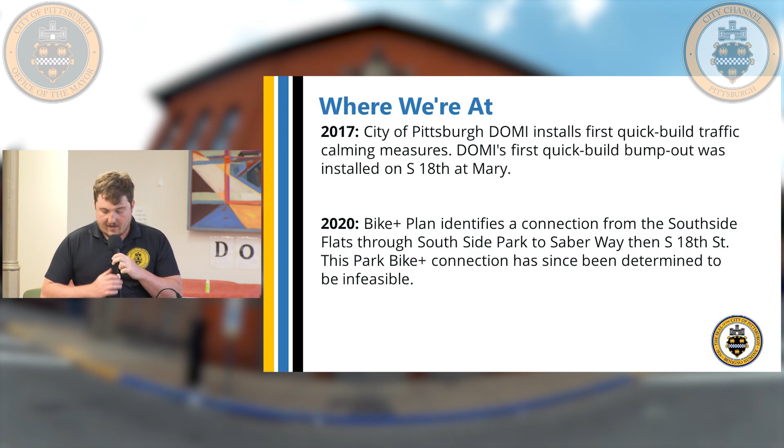So why we're all here is to share the safety context and planned improvements along the South 18th Street corridor between East Carson Street and Monastery Avenue. A little project background: in 2017, DOMI installed the first quick build traffic calming measures, and the first quick build bump out was installed at South 18th and Mary. In 2020, the Bike Plus plan identified a connection from the Southside Flats through Southside Park to Saber Way, and then South 18th Street. That Bike Plus connection has been determined infeasible because of grade changes through the park, so we're looking at making that connection on the street.

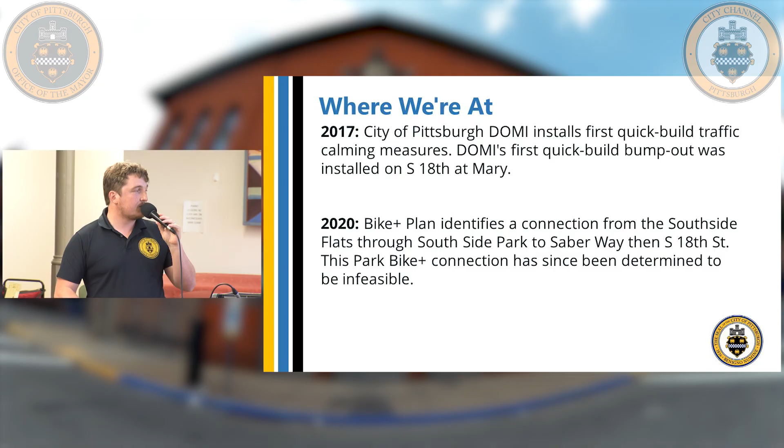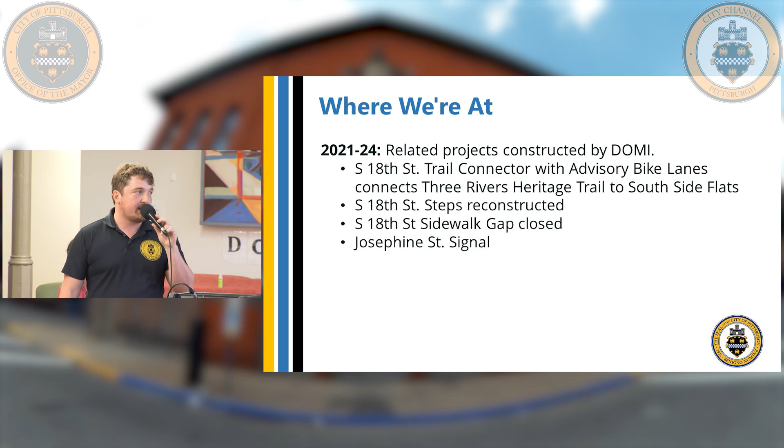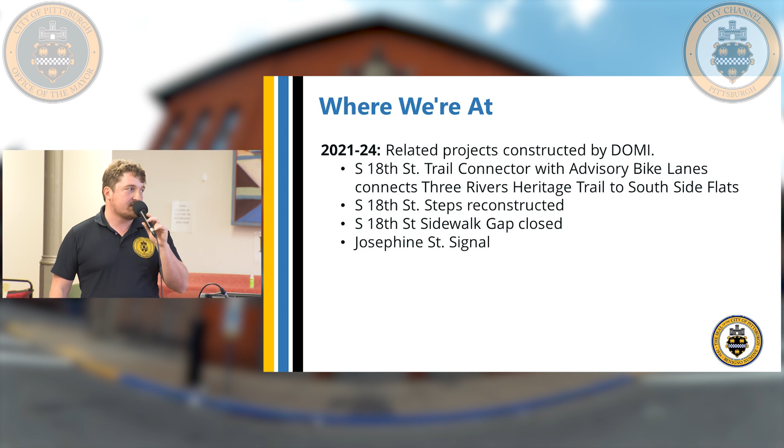There's been a number of related projects that tie in at various extents. There's the South 18th Street Trail Connector with advisory bike lanes that brings it from the Three Rivers Heritage Trail to Carson Street. This spring, the South 18th Street steps were reconstructed, and the South 18th Street sidewalk gap was closed. There's also been changes to the Josephine Street intersection, adding a signal.

Some additional context: in 2024, the city committed to Vision Zero and published the High Injury Network, I'll be talking about that in a second. We also secured funding for Vision Zero projects and chose this project as the 2025 corridor project. Started doing data collection, virtual engagement, some of you have probably been on the Engage PGH page, and now we're here collecting more feedback from folks.

Some of you have probably heard about Vision Zero, it's been a pretty big publicity effort of the city over the last year, but this comes on the heels of a worsening traffic crash epidemic. In 2024, 21 people died in crashes on Pittsburgh streets, and between 2019 and 2023, crashes involving vulnerable road users, cyclists and pedestrians, rose 40%. The 2024 data does show we might be starting to turn a corner there, the number of crashes involving vulnerable road users in 2024 was actually below the number in 2019. I don't think that's a long enough trend to say we've definitely turned a corner, though.

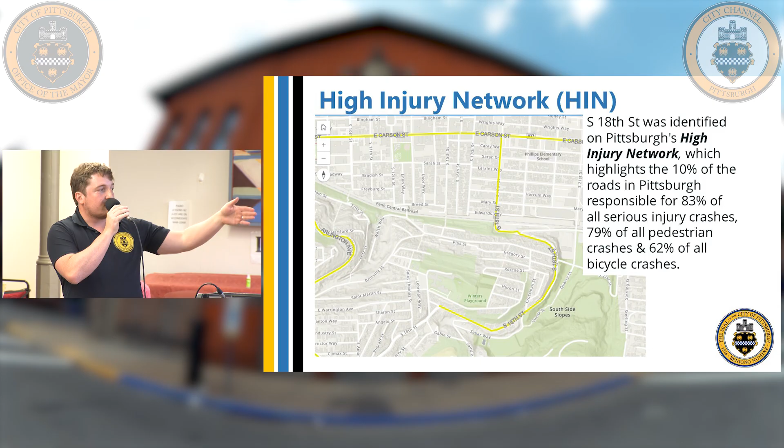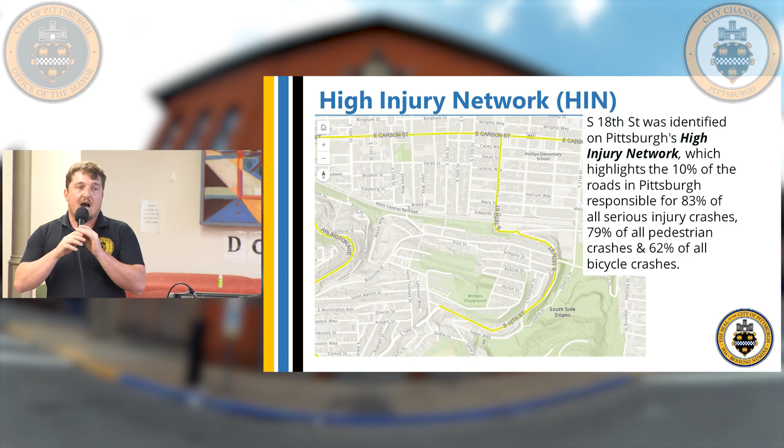So I talked a little bit about the high injury network. The high injury network is the 10% of roads in the city of Pittsburgh responsible for 83% of all serious injury crashes, 79% of pedestrian crashes, and 62% of all bicycle crashes. South 18th Street between Carson and Monastery is highlighted on that high injury network, as is Carson. This data is based on crash data from 2019 to 2023. Some changes on the north section of South 18th Street and Carson Street took place in 2022 and 2023, so we expect to see improvement in some of those places already based on prior changes.

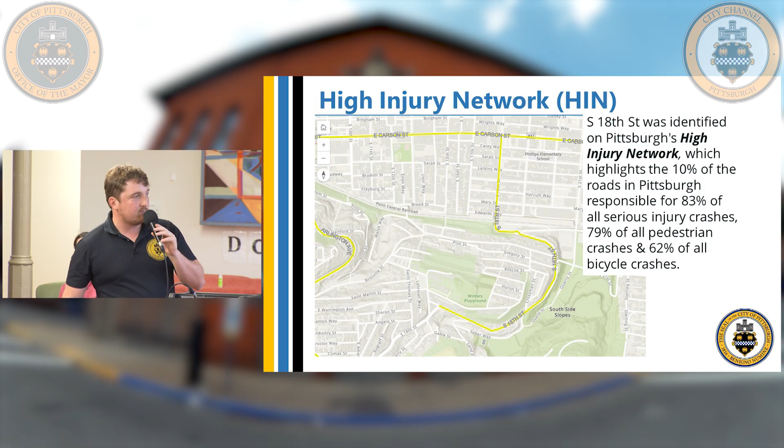Before I move on, I want to make a quick note about Vision Zero. These were at the registration table - this is our Vision Zero community agreement. As the city of Pittsburgh, we have a responsibility to help make sure our roads are safe. But this is also an agreement from our community members to do things like put down your phone while driving, drive at safe speeds, and yield to pedestrians. We're also using it to get in touch with people and keep them updated about Vision Zero, so you can tear off the back part of the slip, leave it at registration, and we'll collect it and add you to our contact information.

So with that, I'm going to hand it off to George to talk about the project context.

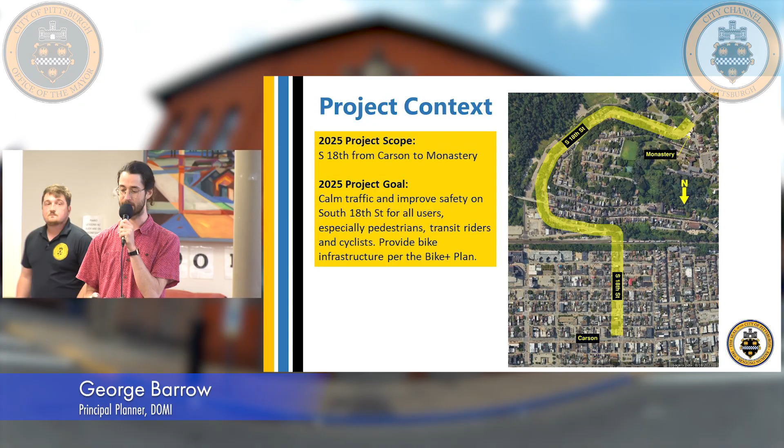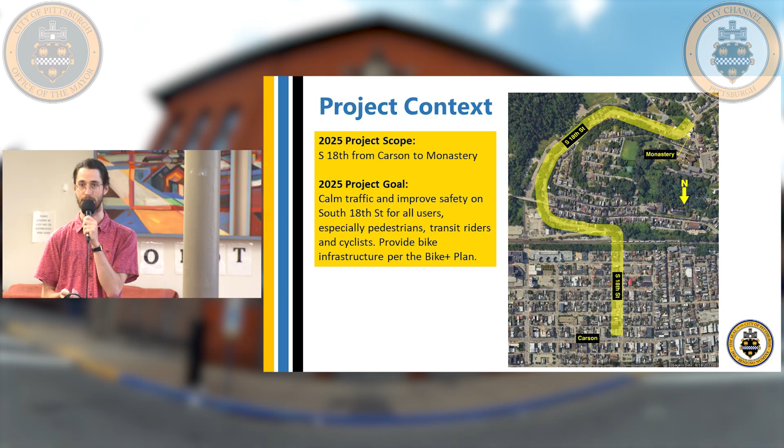All right, thanks, Jan. My name is George Barrow, principal planner with DOMI. Here we see our project context - it actually matches the extent of South 18th that were on that high injury network from the slide before. That is why the corridor terminates at Monastery Ave rather than continuing all the way up to perhaps Arlington. It goes from Carson uphill to Monastery; uphill is up on this map. The goal of the project is to calm traffic, improve safety on South 18th for all users, especially pedestrians, transit riders, and cyclists, and to provide the bike connection called for in the Bike Plus plan.

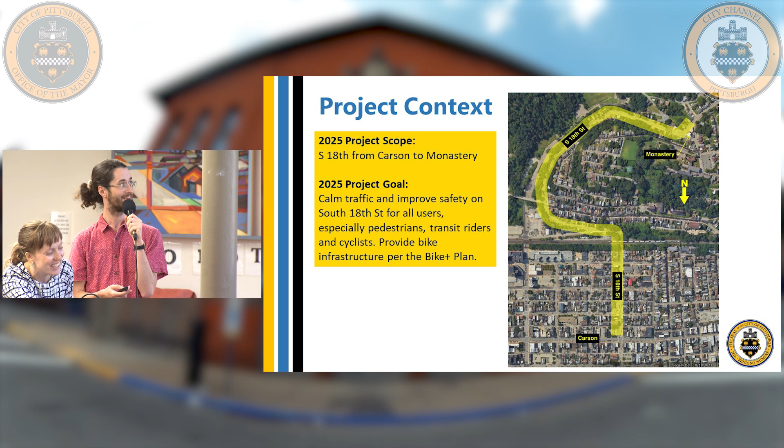Okay, I will speak up. Try turning this - turn it to what you added. You want to say something? Test, test, test. Is that too loud? Is that okay? Better? Okay, sorry, I'm a bit soft-spoken, I realize that.

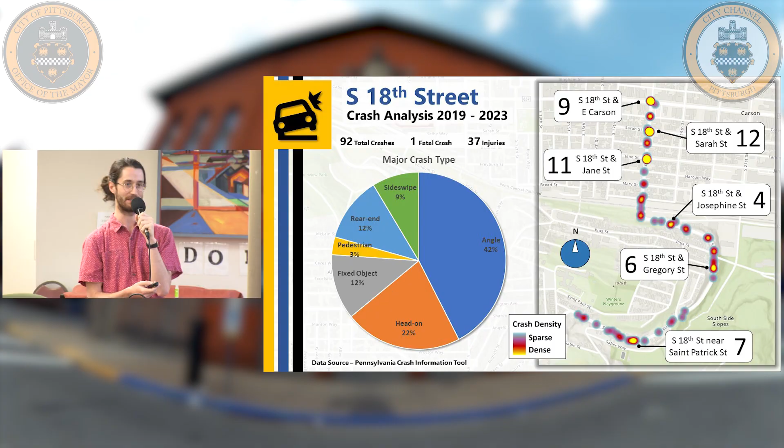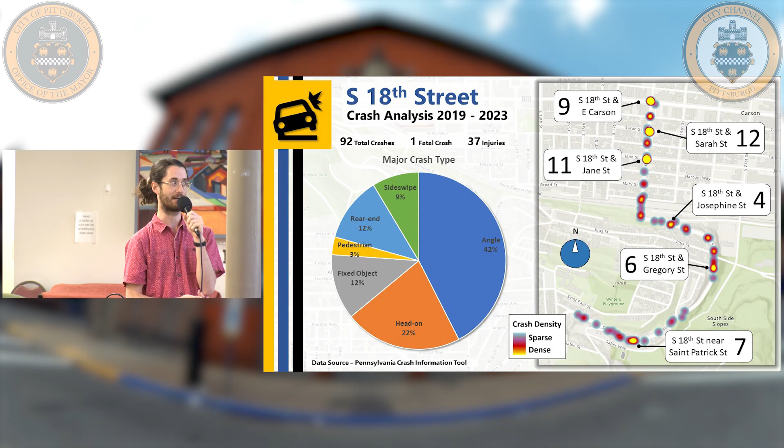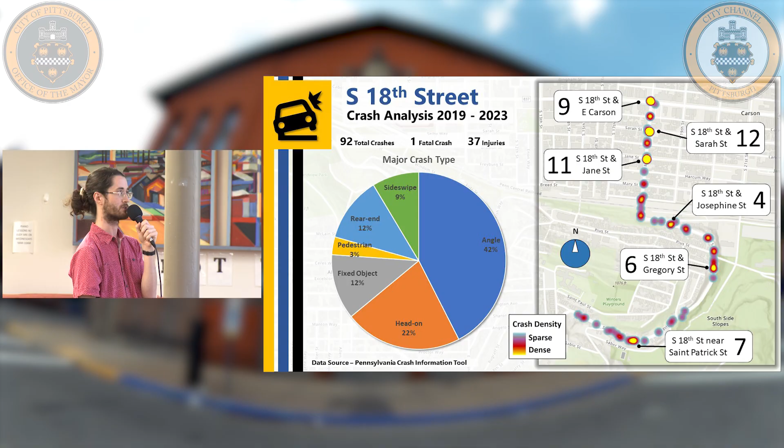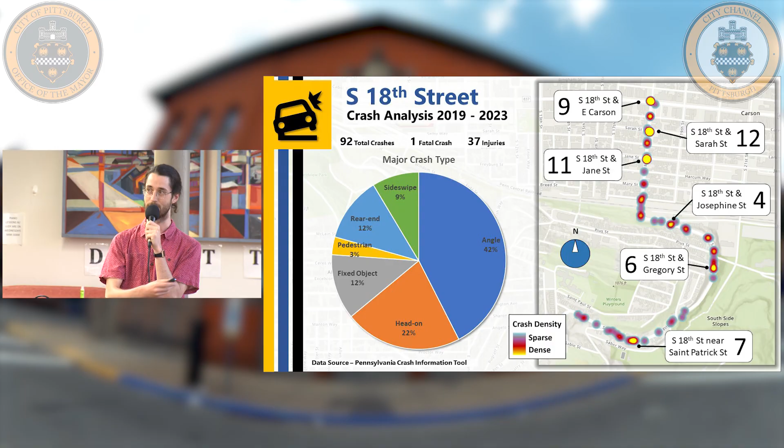So on this slide, we see some of the crash history along South 18th Street. Previously we mentioned it's on the high injury network, but here we have a bit more detail - this is a heat map of where those crashes are happening. You'll notice some high rates of crashes, particularly at intersections and at curves along 18th. In the flats at the top of the map over by Carson, you'll see crashes at intersections. Note this is crash data from 2019 to 2023, and there are actually improvements already in place at Sarah Street and Jane Street, where you see those crash concentrations, as well as improvements at East Carson itself - concrete curb extensions and signal upgrades completed just a few years ago, so those improvements were not in place when this crash data was captured. But along the rest of the corridor, going up the hill, you'll see particularly high rates of crashes at those curves, particularly around Mission, Gregory, and then at St. Patrick, just downhill from Monastery.

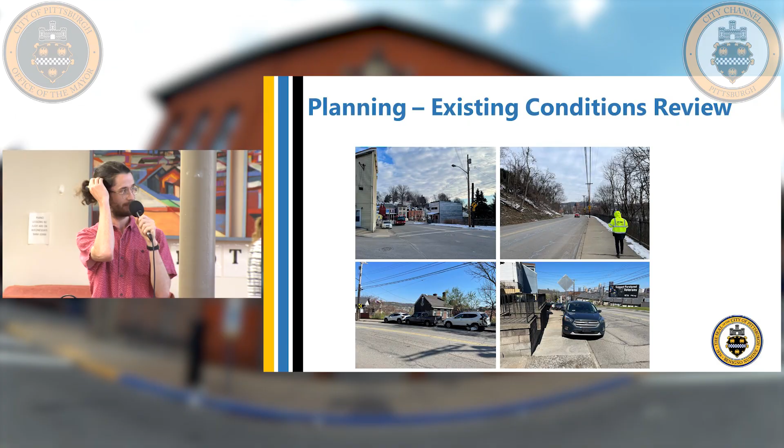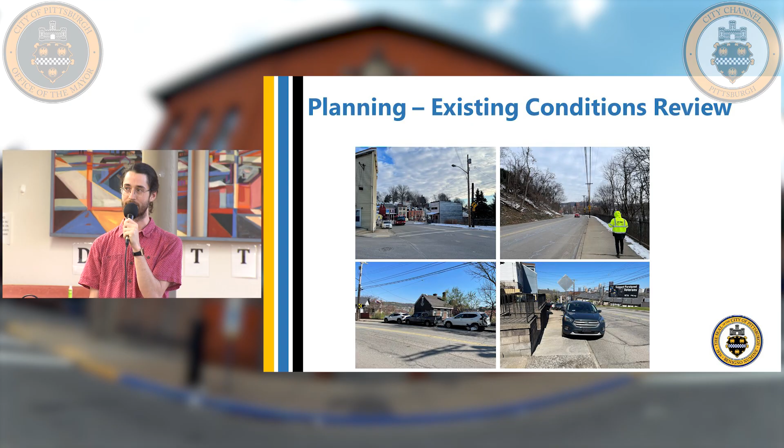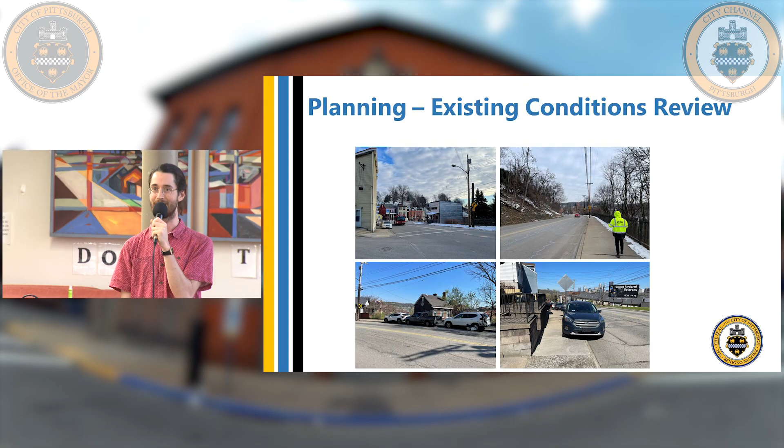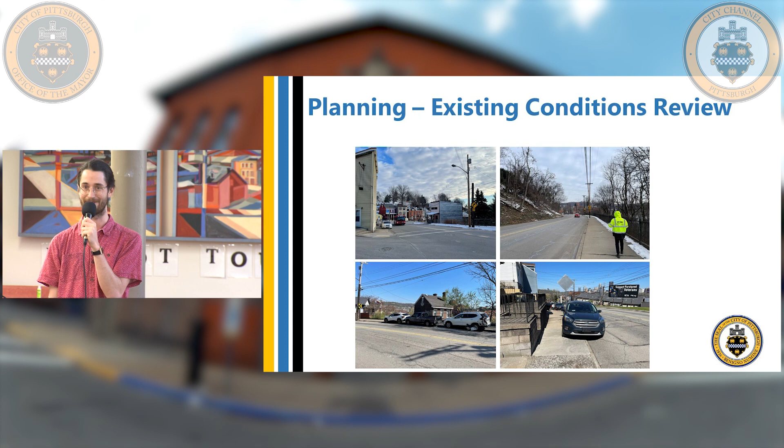So given all of that context, we started going out and walking the corridor. Just a few things we spotted on our very cold January walks of South 18th Street were some obstructed sidewalks - there's a lot of sidewalk parking on this corridor. I want to point out on that bottom left image, you can see some serious damage to vehicles parked along South 18th Street, perhaps showing why people are feeling they need to park on the sidewalk right now. These vehicles being parked on South 18th are frequently being sideswiped, so a lot of damaged vehicles and pieces of vehicles along 18th on our field walks.

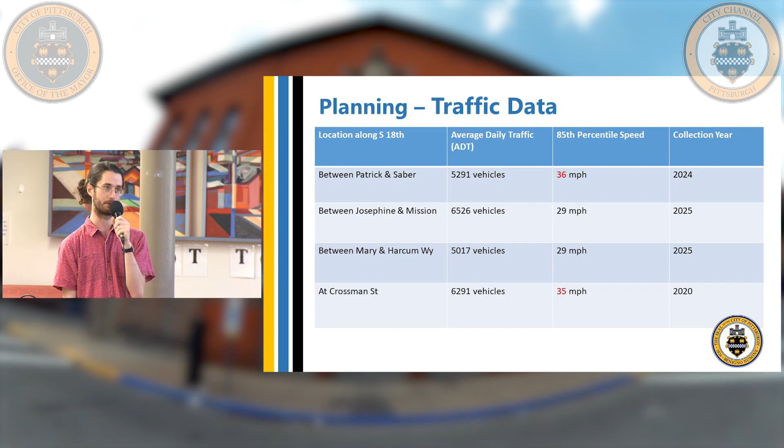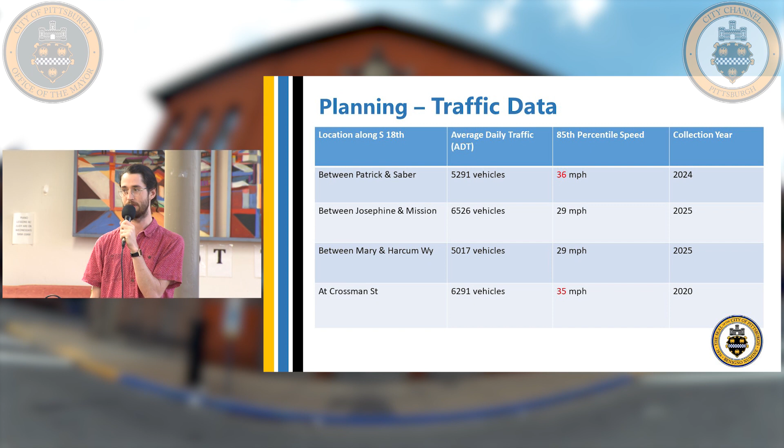Wanted to show some of our review of traffic data along the corridor. There's a lot of numbers here, but I want to point out those two numbers in red - those are the 85th percentile speed. The 85th percentile speed is a traffic engineering measure for the speed at which people feel comfortable driving on the street. What you see here is that the 85th percentile speed between Patrick and Saber on South 18th is 36 miles an hour, despite a 25 mile an hour speed limit. So this is showing a demonstrated speeding issue.

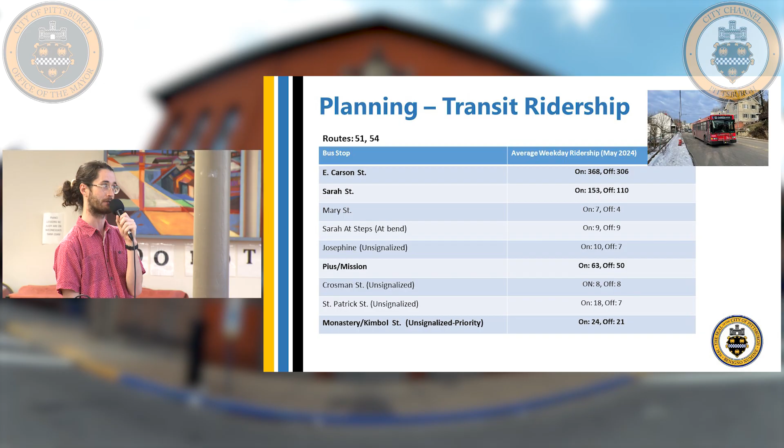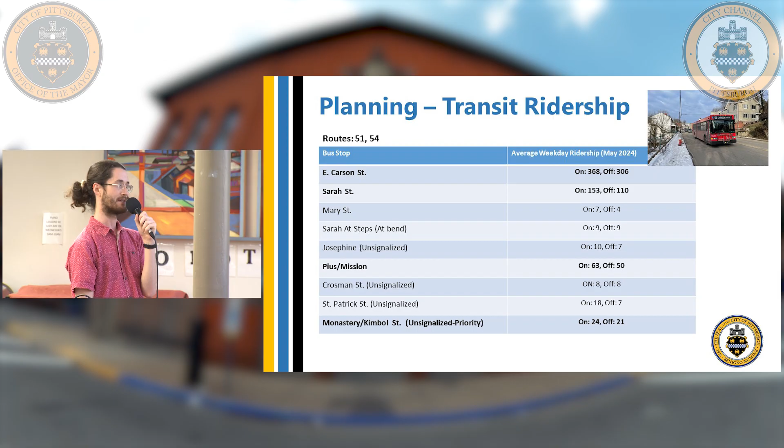Not so many people are getting on and off here—a lot are just riding through. But a lot of people are getting on and off at Carson; those are in the 300s for average daily weekday ons and offs. A couple more highlights are at Sarah, Pius and Mission, and up at the top at Monastery, where quite a few people also get on and off the bus.

So making sure people can board and get off the bus, and cross the street to access bus stops, is a priority for this project.

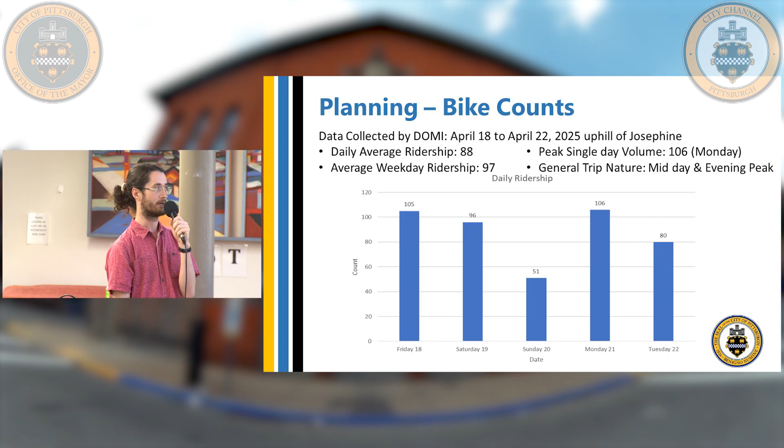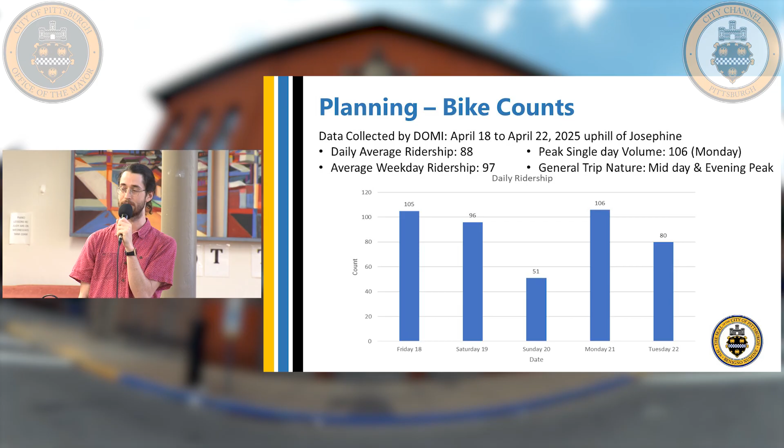We also collected some bike counts—we went out there and installed a bike counter. What we saw was, on average, around 100 bikes a day on South 18th. That's despite pretty much no bike infrastructure on that street as it stands, so it's a demonstration that people are biking here. It's an important connection for the bike network, even though it's currently not a very comfortable one.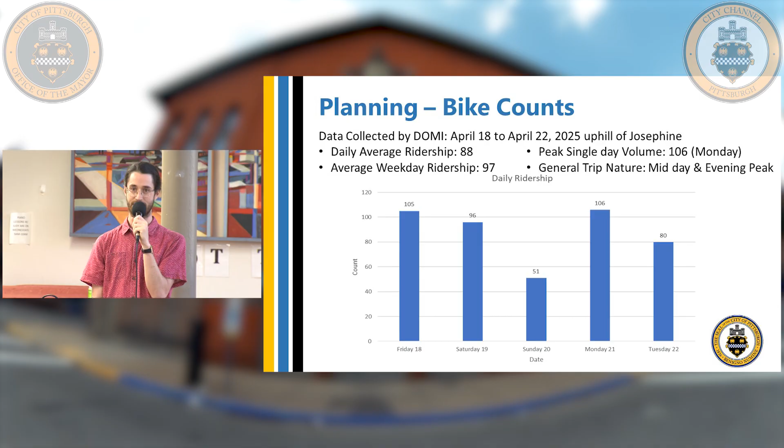We had a survey window from when the project launched around January until sometime in March, when we closed the survey. We will be reopening those surveys after this meeting, and there will be an opportunity to leave more online engagement after this.

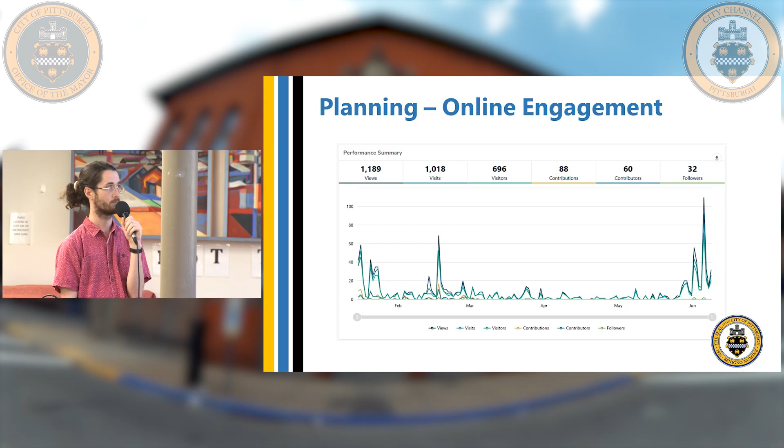So I wanted to summarize some major themes from that online engagement. The top one we saw most frequently was speeding concerns. There was also a lot of desire for a climbing bike lane, and lots of notes about persistent damage to parked cars and a feeling of danger when parking along 18th.

Lots of stories of near-miss experiences—for drivers, for people walking along 18th, and for people cycling along 18th. Lots of near misses and stories of crashes, including some serious personal stories in these comments.

Lots of notes of parked cars blocking sidewalks, making walking very difficult. Also bad visibility at driveways and intersections due to the strange geometry of this corridor and the lots of elevation change.

Dangerous passing behavior, related to the speeding, of course—people are being very impatient on 18th and want to speed around other people. Red light running, especially at Mission Street, was highlighted as a location with persistent red light running.

Difficulty crossing South 18th to access bus stops—both PRT bus stops and school bus stops, which we have up and down 18th—was particularly shouted out as difficult to access near Monastery at the top of the corridor.

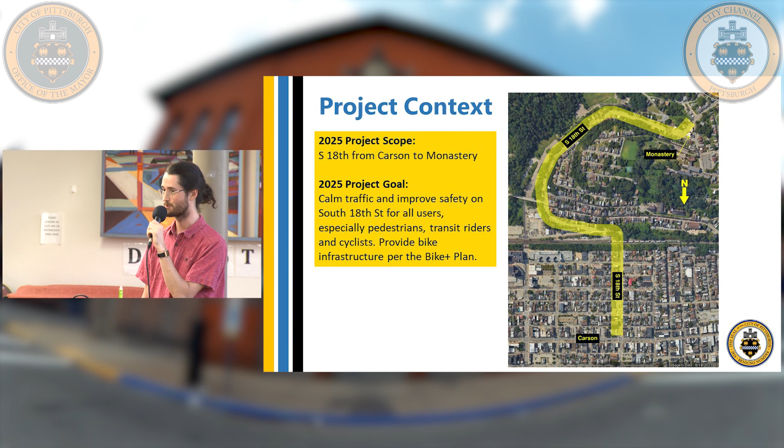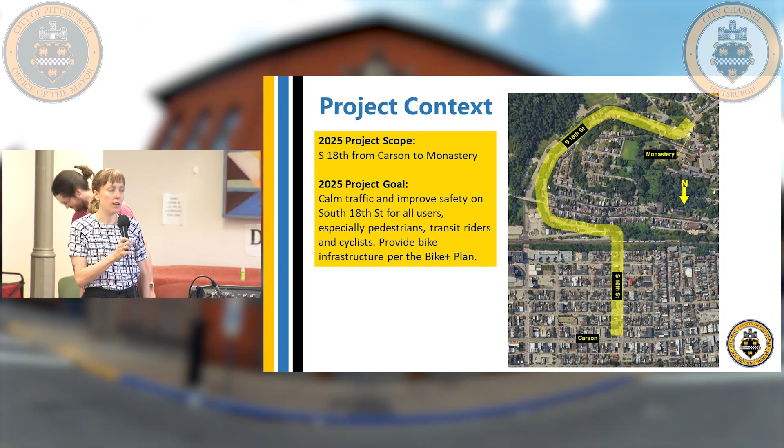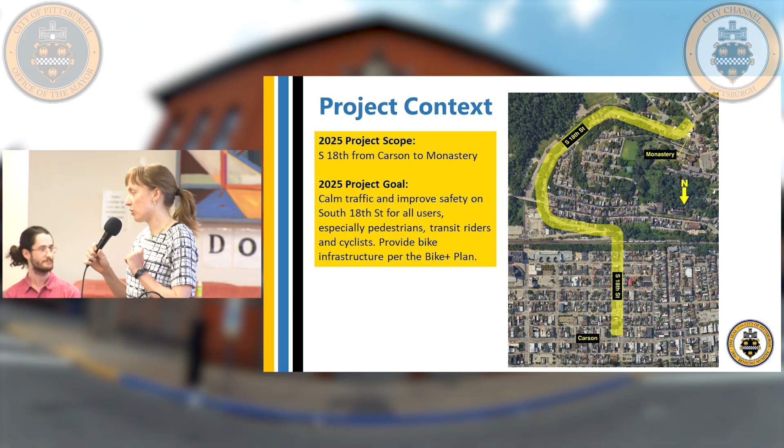I'm a traffic engineer, project manager on the Vision Zero team, and George did a great job working with the community, and now our group is taking it over through design.

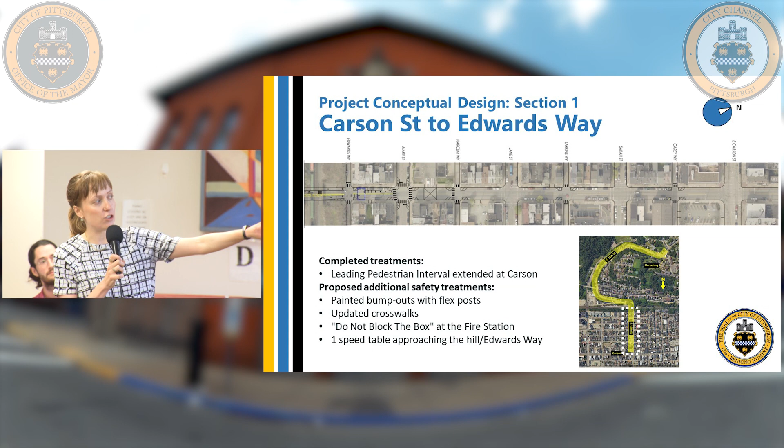Just so you know, I know you've seen this before, but the orientation of all of these, as you can see from the back map, it's a very topsy-turvy corridor, so the orientation kind of changes throughout this. I'm going to do my best to move slowly and explain the orientation.

Could I have that, is there a laser? Oh, there it is. Let's see if it works. Oh no, it doesn't want to work on the TV, I don't think. It doesn't work on the TV. Okay, I will point.

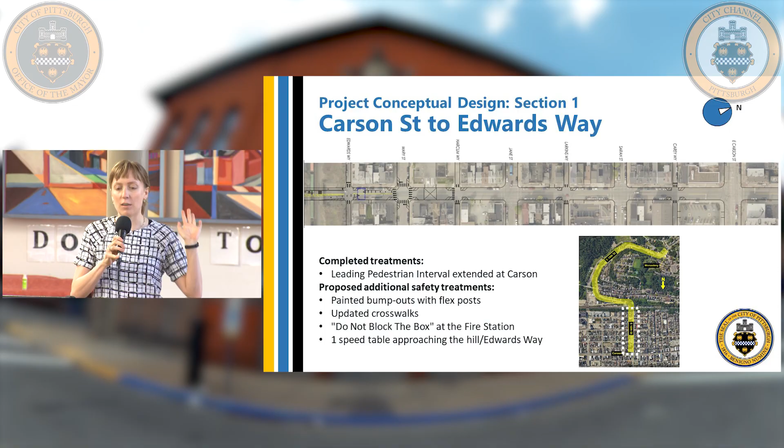So first, we're in the flats, starting at Carson Street to Edwards Way. I'll take a step back and say that this is the initial conceptual design that planning worked with us to come up with, but we are still going to be going through the rest of the design and engineering phase. So this is a proposal. We'll have plenty of opportunity to hear your feedback on specific details, but there's plenty of things that could change between this proposal and what you end up seeing on the road, especially smaller details. But I'll walk you through what we think could work from what we've heard so far.

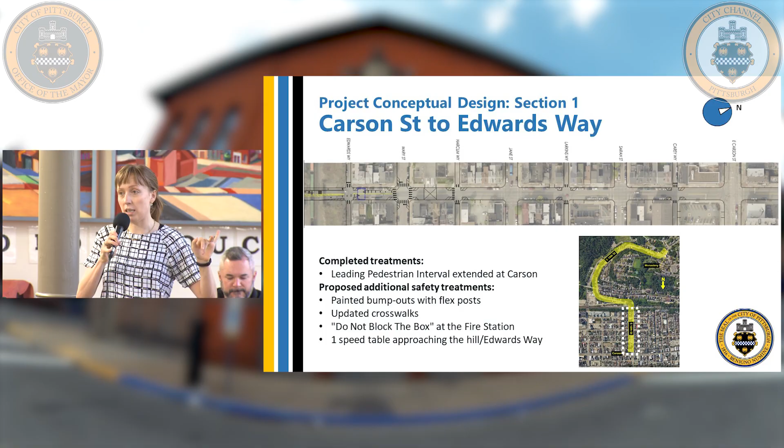Starting at Carson, I'll mention we already did extend the leading pedestrian interval, LPI, the jump that pedestrians get at the signal. During the walkthrough, it came up that it was a little fast. At Carson, it was 3 seconds, and we already adjusted that to a 5-second LPI at Carson.

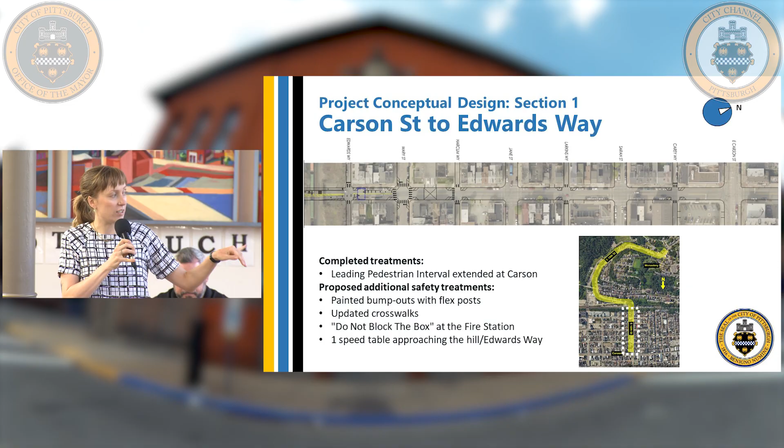Additionally, we will be proposing additional painted bump outs with flex posts throughout the corridor—you'll see this on every slide—updated crosswalks, and here at the fire station, we're proposing a do-not-block-the-box pavement marking. We've done this at other places in the city. Then the first speed table approaching the hill as you head that way.

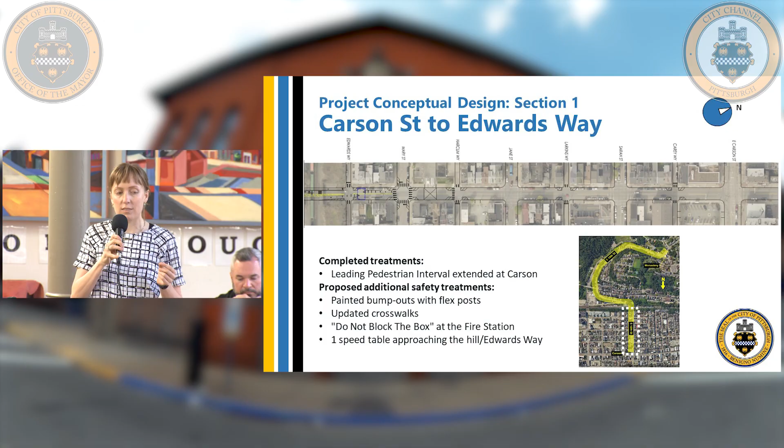So you'll see it right here. This is the base of the hill. This is Edwards Way. A speed table is a lot like a speed hump, but they're a little bit wider, so they're easier for buses, easier for emergency vehicles, but they still slow down cars, just not quite as much as a speed hump, which we would save for more of a residential, quieter back road.

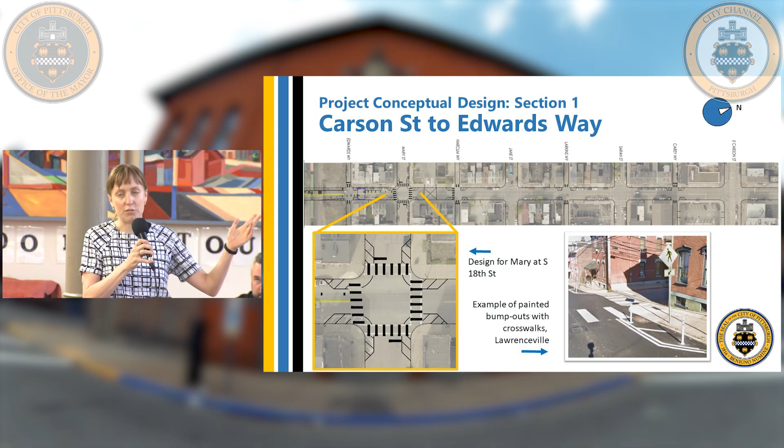I realized after that this is the location that already has painted bump outs, but I provided another, more recent example from Lawrenceville to show a zoomed-in view, because I know it's hard to see, of what it looks like in the plan, and then an example from another place in the city.

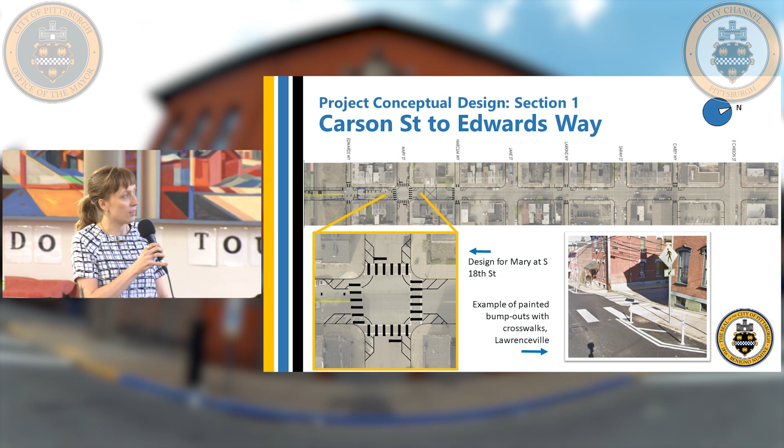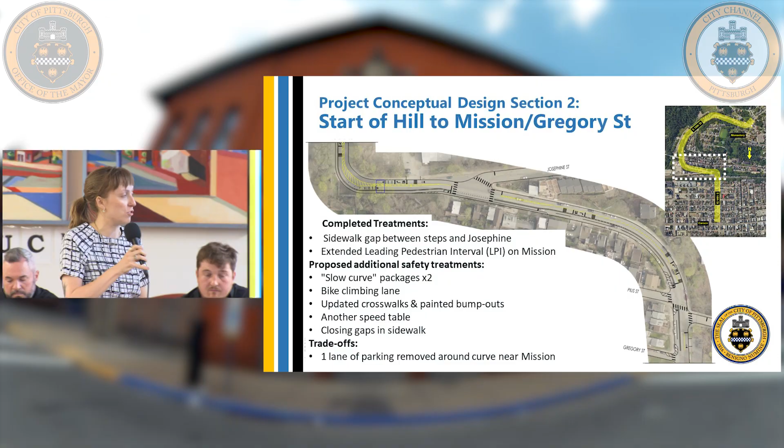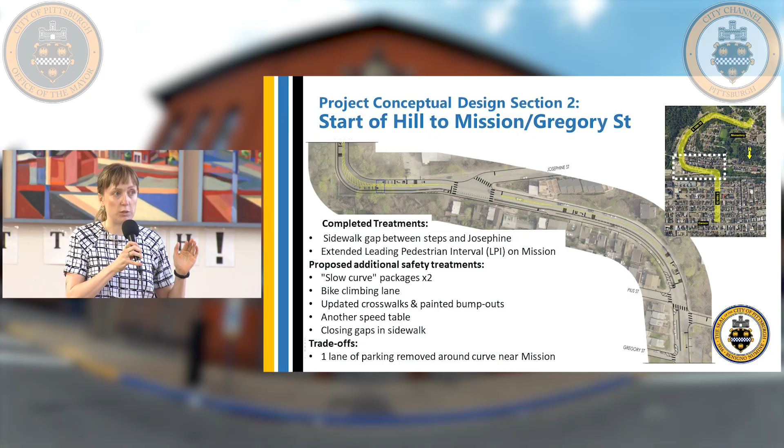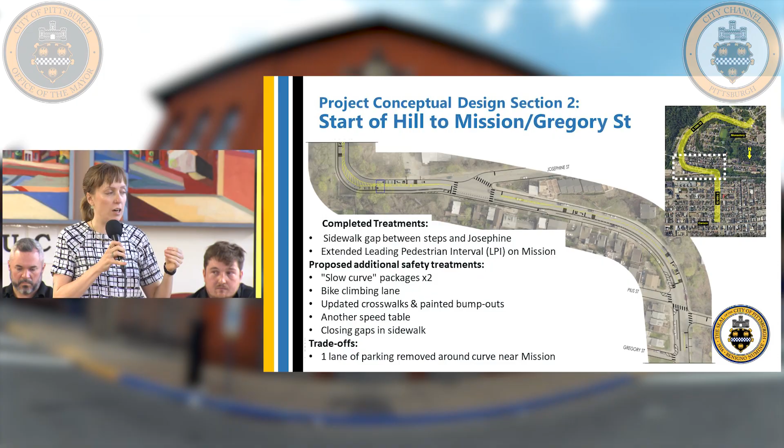We also completed some things already, including extending the LPI on Mission Street, like we did on Carson, again from 3 to 5 seconds. We heard a demand from the community walkthrough about the sidewalk around this curve—there's a large gap. DOMI was already working on the steps project there, so while we were there, we were able to close that sidewalk gap very quickly. We kind of took the opportunity. So right now, we already built the sidewalk along this first gap around the curve—you can see that today. I have some photos coming.

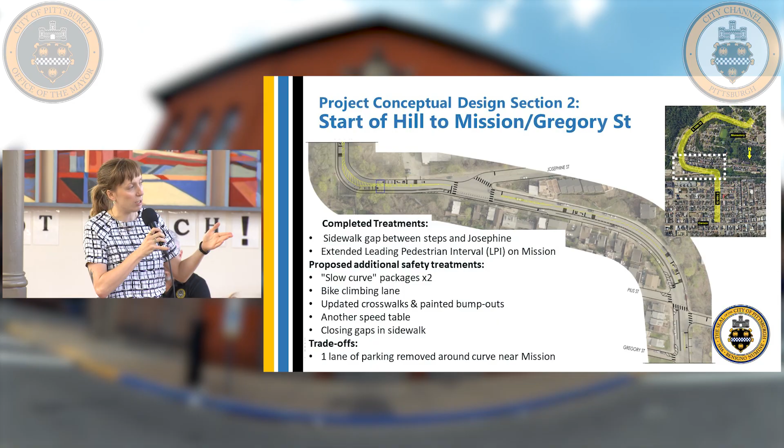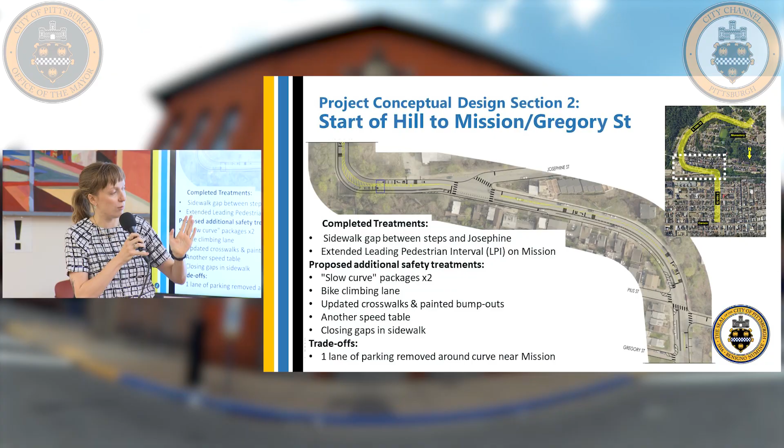The trade-off for this is that in order to fit that climbing lane, we're going down from 2 lanes of parking to 1 lane of parking. On this side, all the no-parking through Josephine is already there, but on the outer curve is where we're proposing removing the parking, so the parking lane switches sides throughout the corridor. That's because we wanted to prioritize parking on the side with the most residences whenever we could, starting here around this curve on the inside.

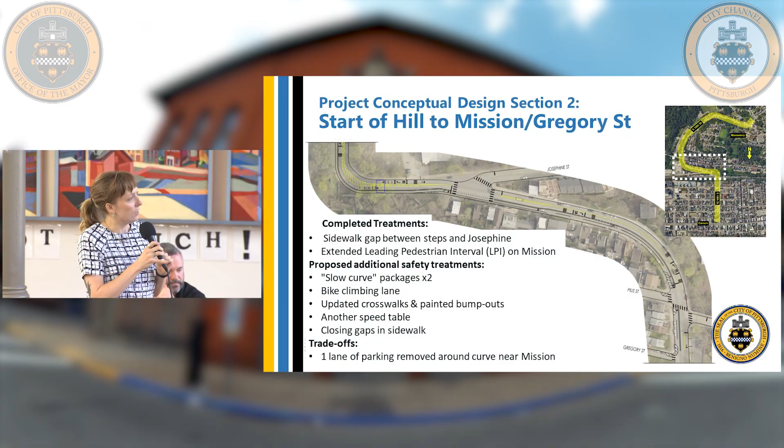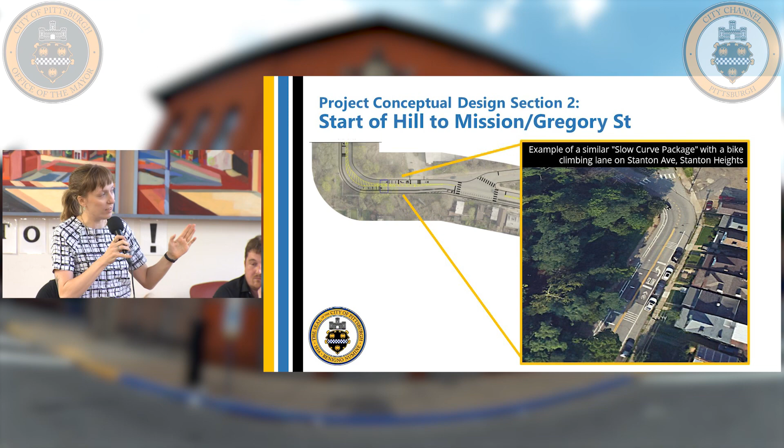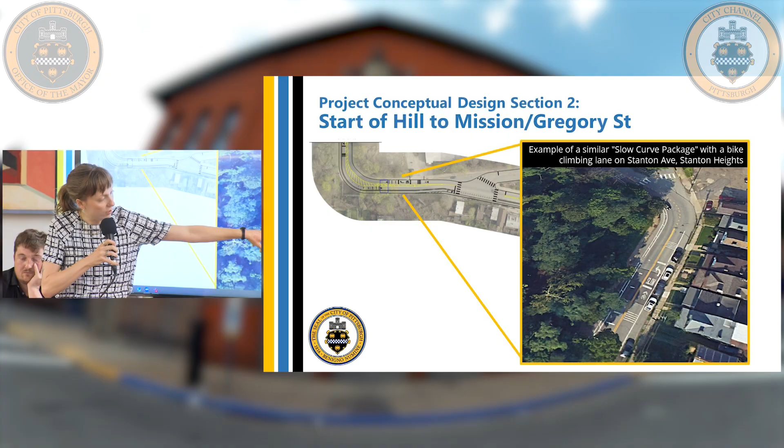Next slide. Here is an example from Stanton Ave, another project DOMI installed a few years ago in Stanton Heights. It's very similar to this, so if you wanted to see an example, it has a bike climbing lane, as well as something similar to speed tables, and then slow curve packages—transverse markings that create that rumble, slow curve markings on both sides approaching the curves, and of course a bike climbing lane as well.

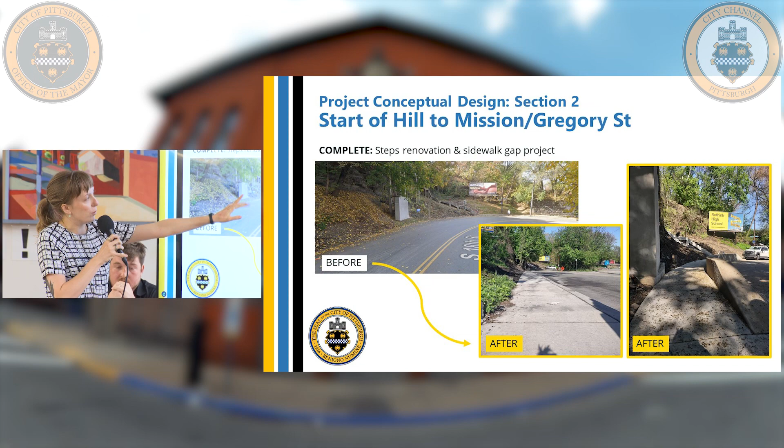That's a good example from Google Earth imagery. And here is the completed sidewalk gap. You can see before, nothing at the bottom of those from the steps out. So today, this beautiful new sidewalk.

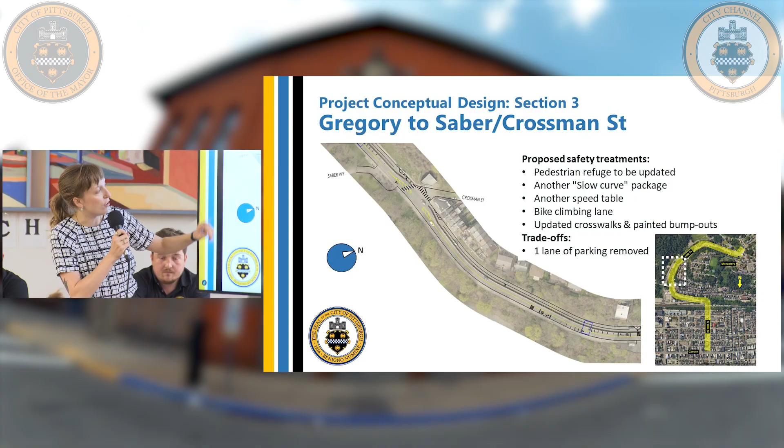All right, we're moving on to the third section. We're moving up the hill from around just past Mission and Gregory Street up through Saber Way. I know there is some painted refuge island here that would get adjusted and updated, so we'd be adding more, maybe better vertical elements. We haven't gone into material selection yet, but we'd be looking at another slow curve package.

Approaching as the curves continue, another speed table, the bike climbing lane, updated crosswalks, and painted bump outs. I'll mention too with the speed tables, this concentration is not as high as you sometimes might see on typical traffic calming corridors. They're more targeted here. I think there's 6 along the corridor, which is a lot less than you might see on a typical traffic calming project.

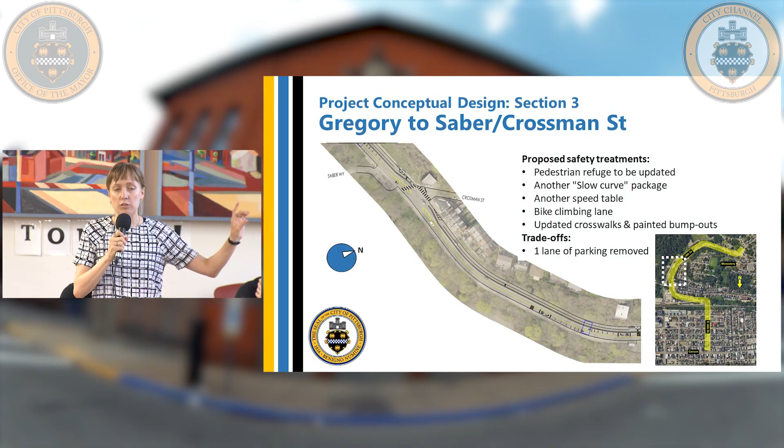The reason for that is, one, we're trying to find a balance with emergency vehicles. And we think a good way to approach that is, and also we have limited budget, if I'm being honest. So what we're trying to do is prioritize the areas that have the highest crash rates. So you'll see those speed tables line up pretty frequently with the slow curve packages, and all of the pavement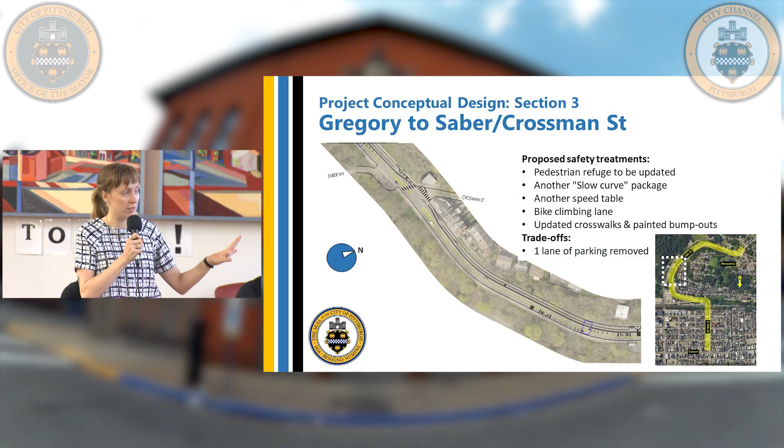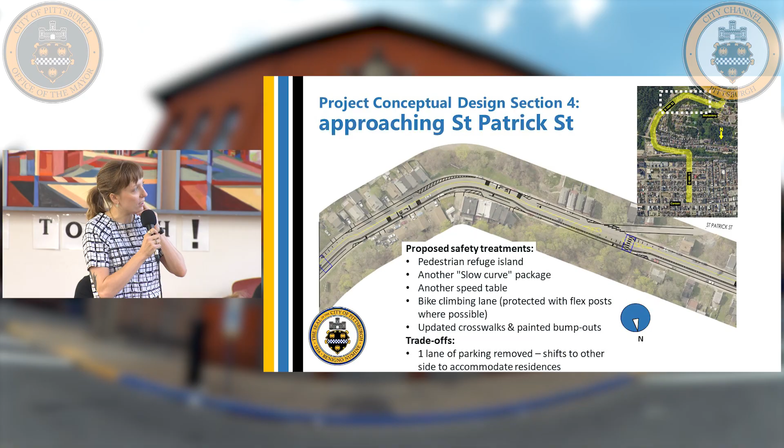markings and elements that come around the curves is where most of the proposed speed tables are. And so as we move our way higher on the hill, you'll see a lot of the same things. I encourage you all to look at the back to see more detail, especially if this is an area that concerns you, because these are some good examples of shifting the parking lane back and forth.

I think with the curves of the street, I'm curious what it would feel like driving. We've done a lot of shifting on projects like this in other areas of the city, but this is a very unique corridor, so I'll be curious to hear your thoughts.

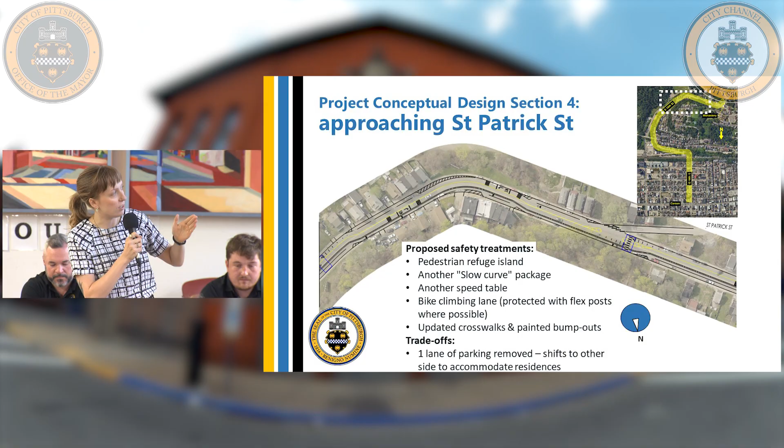But a lot of the same things you see here: a pedestrian refuge island at St. Patrick Street, which is one of the access points to the park, another slow curve package, another speed table, continuing the bike climbing lane. On the areas where it's not the same side as parking, there may be opportunities to introduce protected bike lane elements like flex posts, and of course updated crosswalks and painted bump outs.

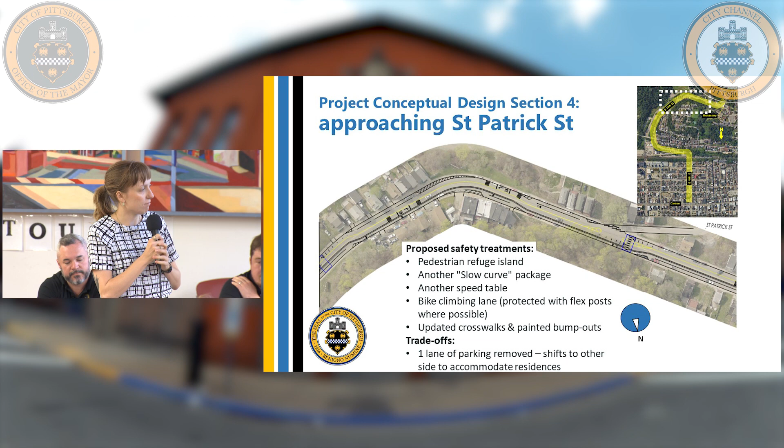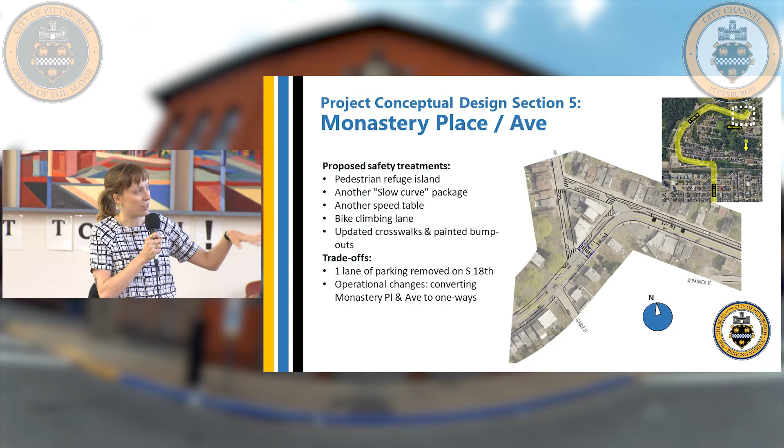And this is the top of the hill for this scope. This ends at Monastery Ave, or just through Monastery Ave. We would tie it back in. And these intersections are very interesting, I'm sure, as many of you are aware.

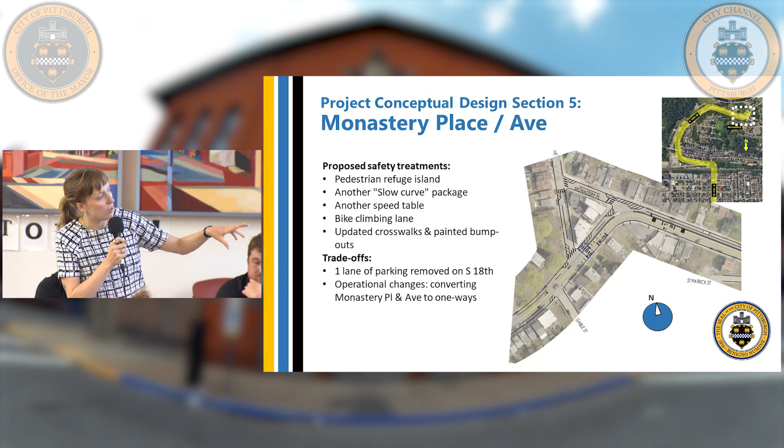We are proposing - there's not a pedestrian refuge island on this photo, that's my bad - but bump outs, crosswalks, things to improve sight lines. We saw a lot, and another speed table around this curve. And the speed table, actually, I forgot to write this down, but we're proposing incorporating it as a raised crosswalk.

We think that this is a good location. I know there's a lot of transit ridership, it sounds like, here. Would love to hear your thoughts on that.

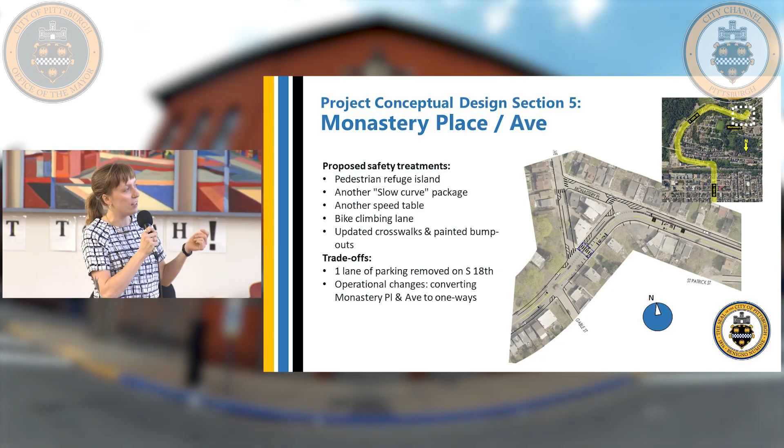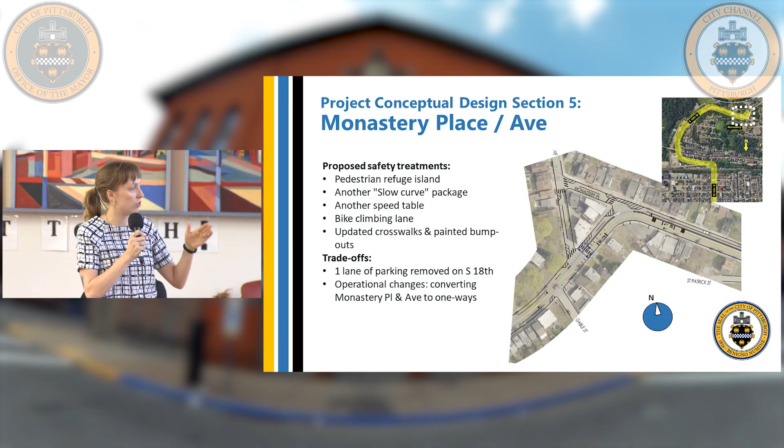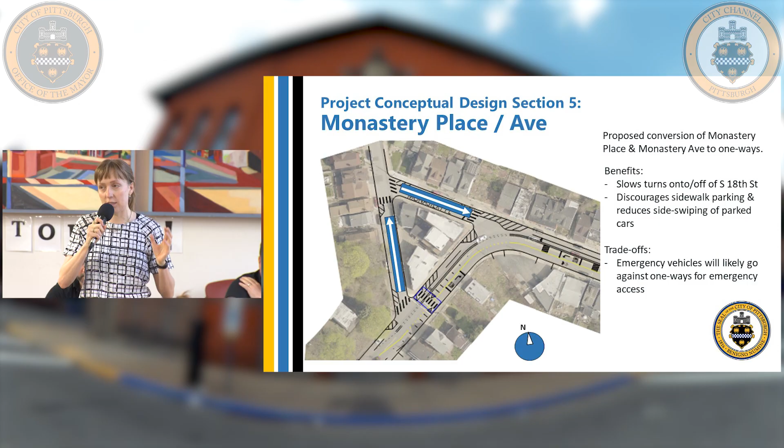perhaps maybe not exactly what you would expect. We think that we can provide the most safety by choosing this direction. So you'd be coming down this way and up this way. The reason for that, and we can dive in more if you are interested in talking more about this intersection, is basically that if you were to go the opposite direction and have this uphill, they would be able to move very quickly through here without having to cross any traffic.

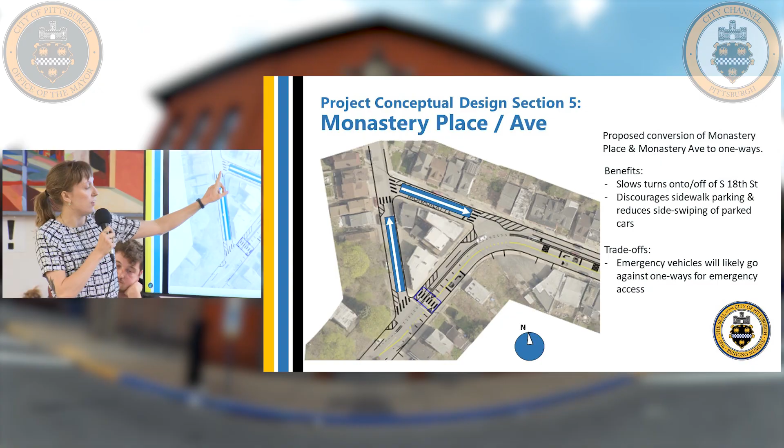We think that would create a more dangerous condition than making this harder turns. So if you're coming down, you have to cross the oncoming vehicles, stop and look both ways, and then go down. So we think the sight lines will be best. The traffic will move the slowest if the one-ways go in this direction. So that is our proposal.

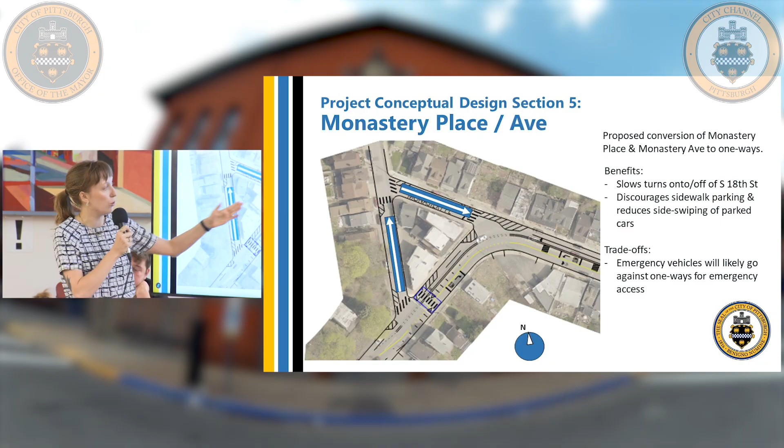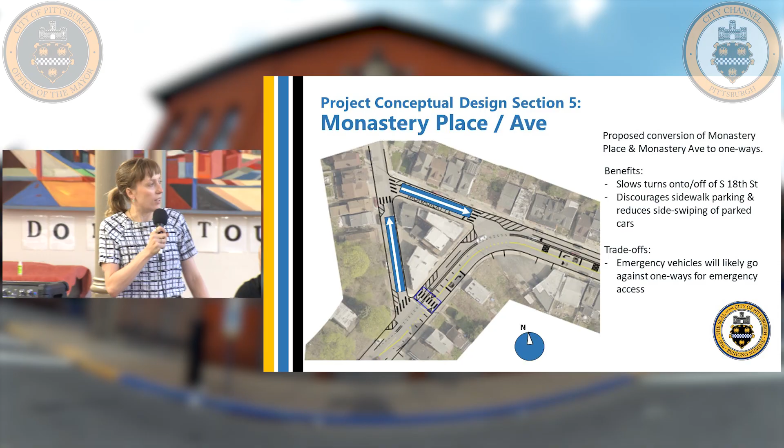But we do expect that emergency vehicles in emergency situations may want to go against the one-ways because they want to move as fast as possible through these intersections. So that is a trade-off, potentially, with this configuration. And that is the end of the slide. I'll let Jan talk about what's next.